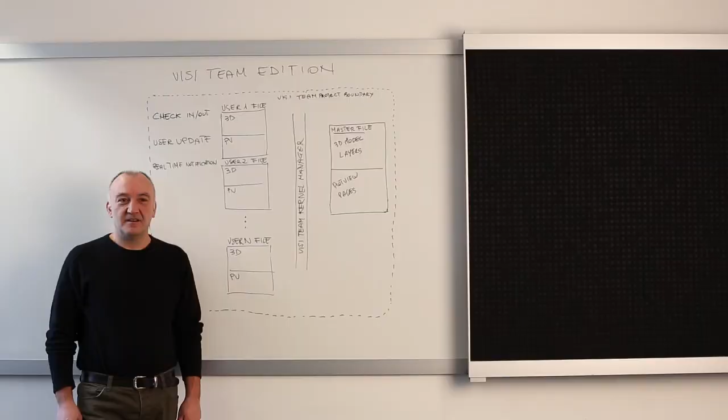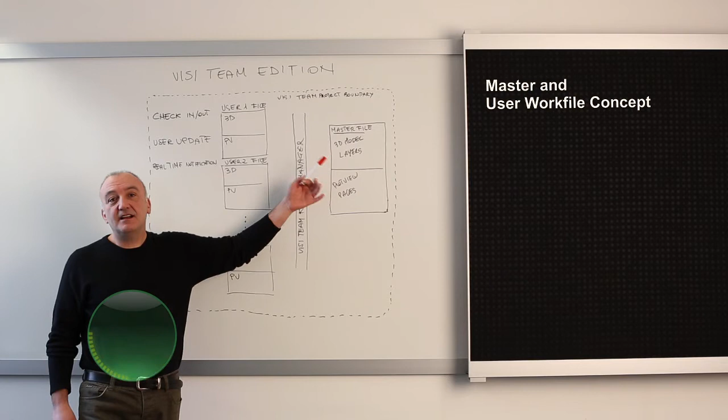The VISI Team Edition implementation is based on a number of fundamental concepts. First, the master work file and user work file concept. The master work file contains all data created by each individual team user.

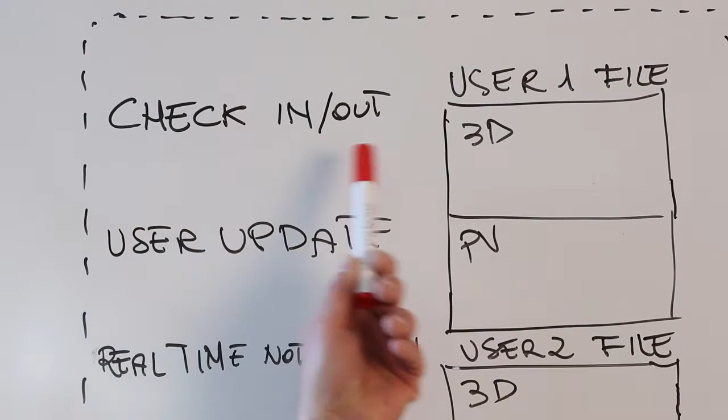As users should be able to work independently, VISI implements another file type, user work files. These are file copies directly assigned to single users, allowing them to perform their individual jobs.

Another fundamental principle is the check-in and check-out concept. Every user working within the 3D modeling environment or the 2D plot view environment has the ability to reserve a set of layers in the 3D environment or a set of pages in the 2D plot view, which moves them to a single user mode.

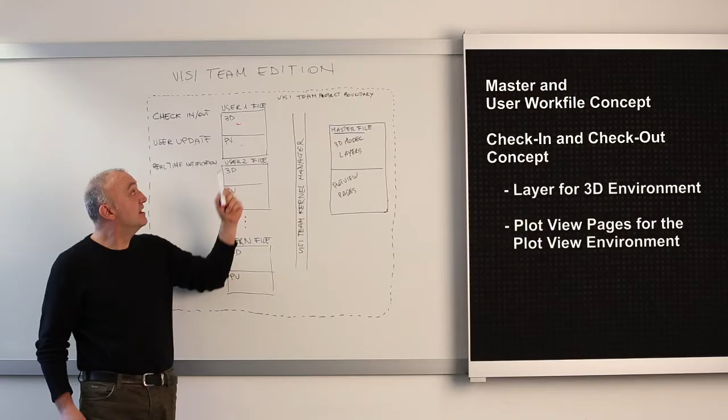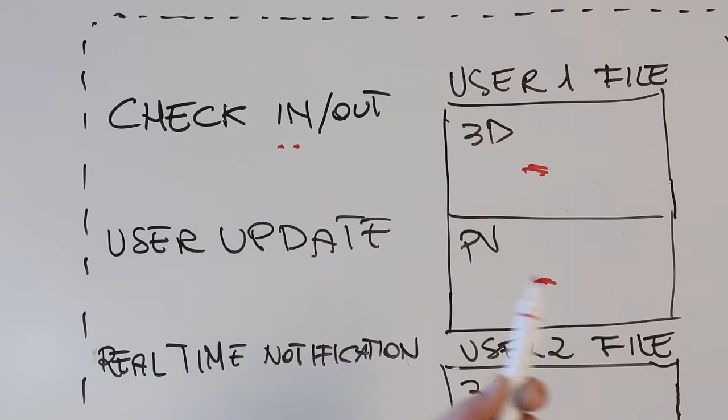This mechanism is called check-out. Once a user performs the check-out operation, they have exclusive access to the previously selected layers and plot view pages. This feature enables them to work independently until they decide to share their progress with the other team users.

The sharing operation is called check-in. During the check-in operation, the user data is transferred from the user work file 3D environment into the master work file 3D environment. In addition, all active team users receive a real-time notification about the changes made within the master work file.

This allows them to perform an update operation, which means they can apply the work progress checked in by another team user to their own user work file.

All concurrent accesses to the master work file are handled by a software layer called VISI Team Kernel Manager. It is specially designed to ensure a solid performance when operating in team mode.

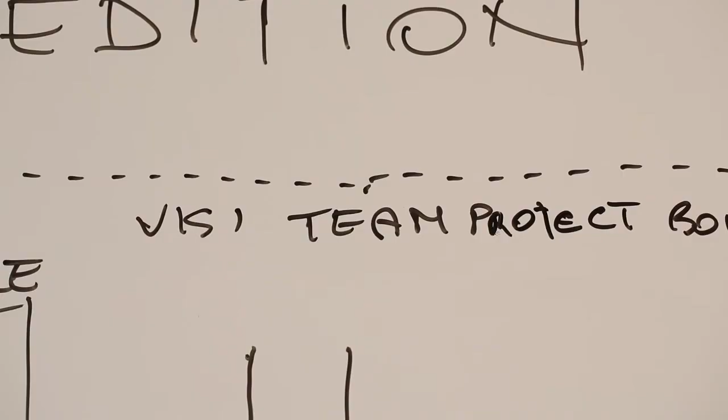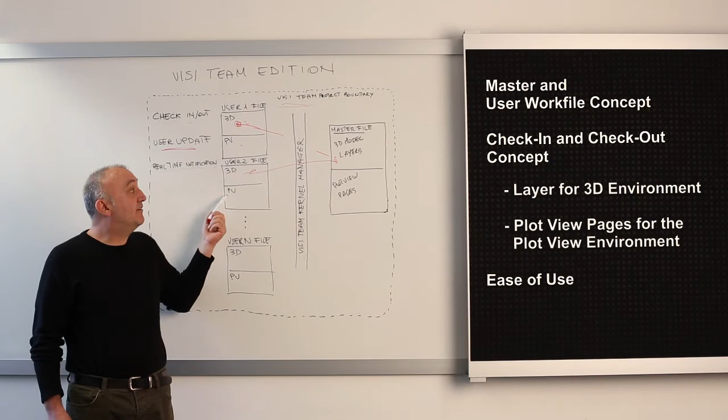The third essential concept is the ease of use. Team users do not have to deal with either the architecture or the handling of internal mechanisms. VISI Team provides a completely transparent and easy-to-use interface that enables users to work both independently as well as together with the whole team.

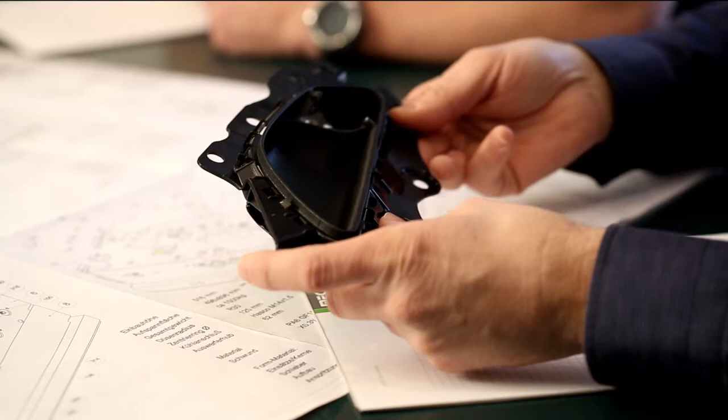In our realistic example, a team should design a complex injection mold. For this task, two 3D designers and one detail designer are designated. The first designer edits the ejector side, while the second designer creates the injection side. The detail designer supports the team with the 2D plot view creation.

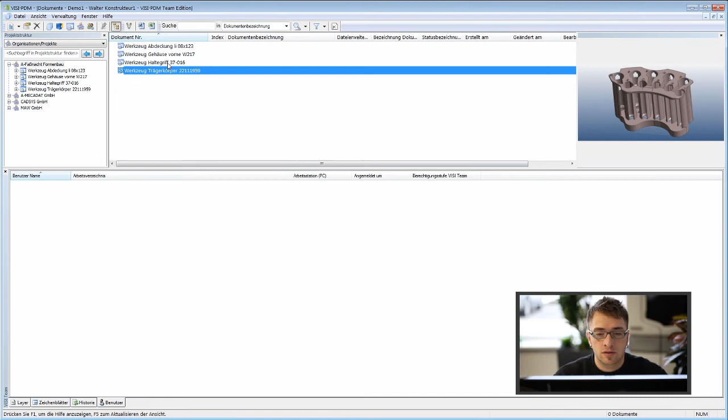At first, the team leader creates a project in VISI PDM Team Edition and includes a basic design he prepared previously. Basic structures for the tool, such as size or layer definitions, are defined within this design.

Once the foundation is defined, the team leader activates the team mode. He sees the layer structure and the plot view pages definition of the basic construction in the VISI PDM Team Edition. In the next step, he defines the design team by adding users.

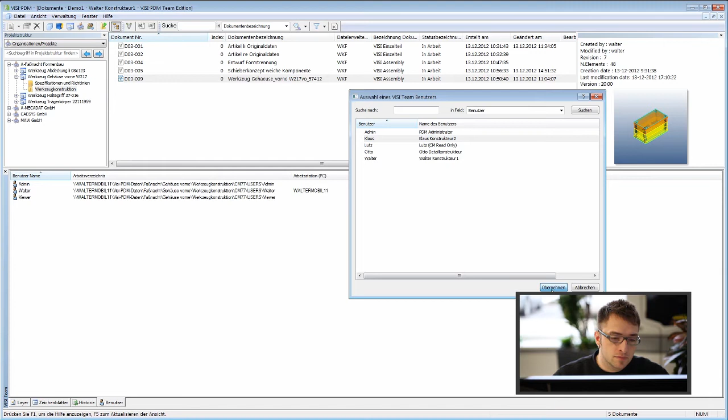The first designer reserves the necessary layers of the ejector side via a so-called checkout operation. Thus, all layers assigned to him are unlocked within the 3D environment and he can start the real design work.

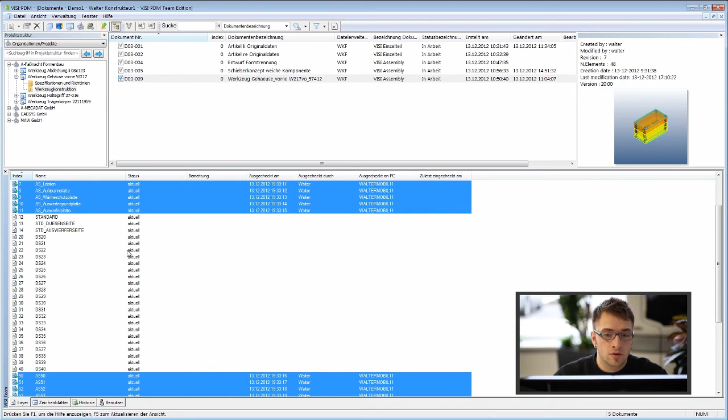At the same time, the second designer, who is already logged in at VISI PDM, begins work. He sees that certain layer sets of the ejector side of the tool are currently being edited by the first designer. Consequently, these are not available to him. The second designer starts working on the injection side by reserving the relevant set of layers.

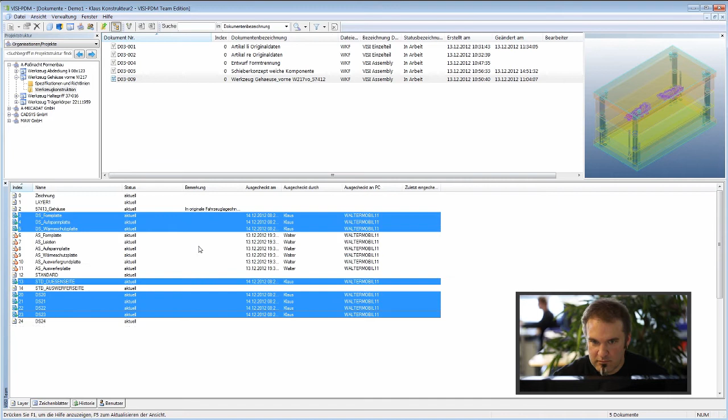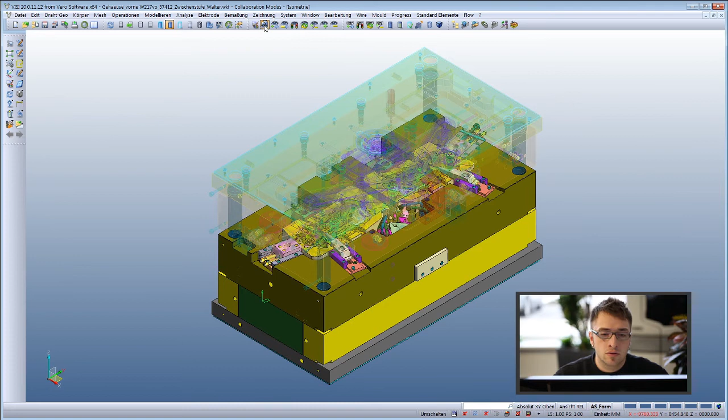The designer starts VISI and begins the real design process. As the design progresses, every designer gets to see all sets of the tool. Sets not currently edited by the designer himself are displayed in a faded-out, transparent way and locked for edits. In the Layer Manager view, the current status of every layer is displayed for all users.

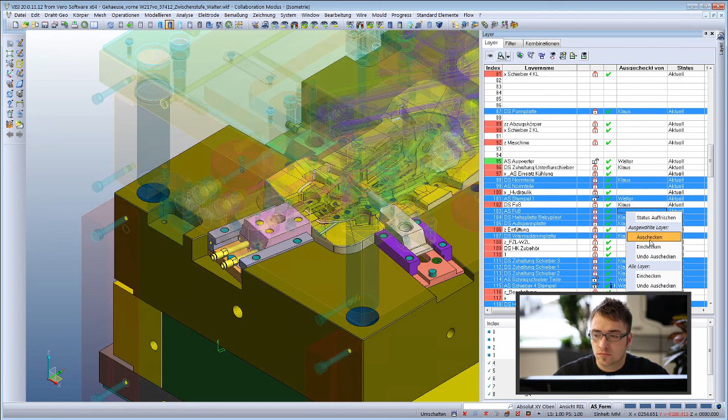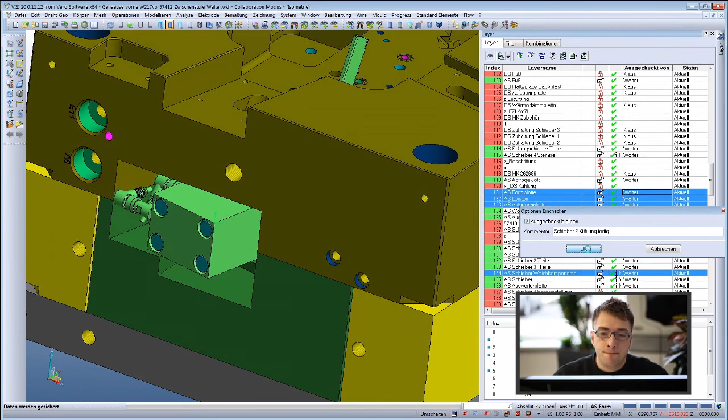Operations like check-in and check-out can be run with the Layer Manager to reserve additional sets or create new ones. Our project is now in a progressed state. The first designer installs an underfloor slider as well as the cooling of the die plate. The designer has now completed the design steps mentioned previously. Thus, the progress made should be provided for the team members, so he checks in the relevant layers.

During the event, the master file is updated and the comment previously created by the designer is added to the history. The second designer receives a real-time notification with the corresponding comment. With the Layer Manager, the status of the updated layer changes.

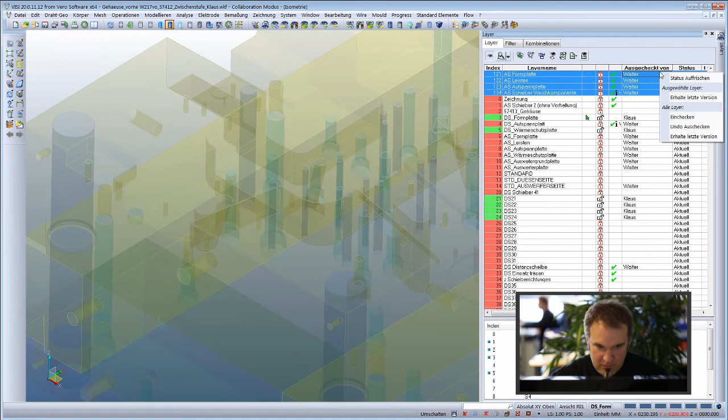VISI displays that these layer sets are deprecated in his design. Consequently, the second designer updates his file and is now able to view the current state, including all changes made by the first designer. He can access locked layers and perform operations such as measuring, querying, etc., and continue working in his environment.

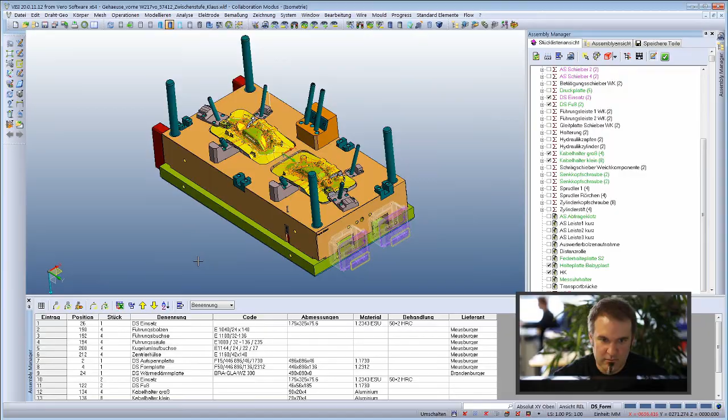Another important aspect is the bill of material. Although the designers are working on different sets of the tool, they can simultaneously edit and complete their section of the bill of material within the VISI Assembly Manager. The bill of material view of VISI PDM displays the current bill of material version of the whole design.

You can not only distribute the 3D environment among multiple users, but also the plot view pages to speed up the tool documentation.

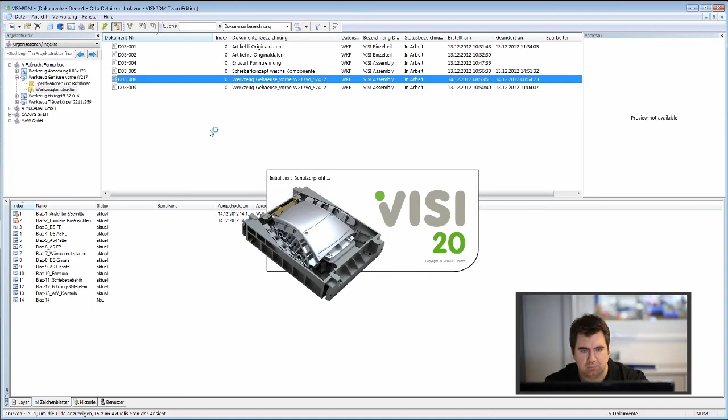After the launch of VISI, the detail designer is able to reserve the desired plot view pages and create new ones. In the plot view manager, the created plot view pages are displayed with their corresponding status. The designer checks out a 2D plot view page and starts the plot view creation.

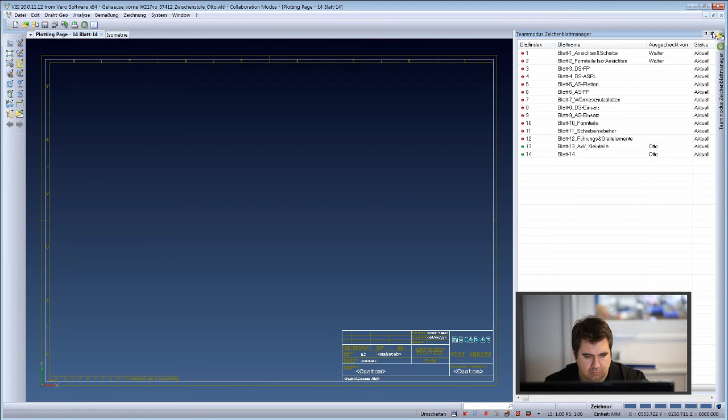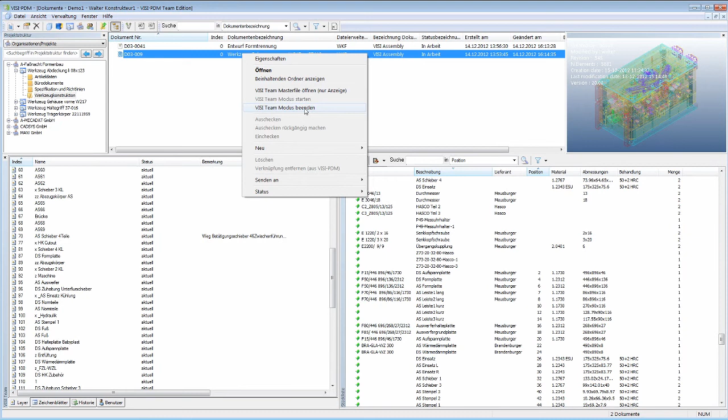Plot view pages assigned to him can be viewed but not edited by other team members. After the completion of a plot view page, it is checked in again, resulting in an update of the master file. If all design jobs are checked in and the design is completed, the team leader ends the team mode. Afterwards, the whole design, including the plot view pages, is again in a single work file that is now ready for production.

VISI Team Edition consists of VISI Modeling and VISI PDM. It is an integrated solution that allows the design process to be split among several team members.

Distribution and management of their project data is handled completely and automatically by the VISI system. Therefore, the user can completely focus on the tool design without having to worry about any of the processing mechanisms.

This makes VISI Team Edition the ideal solution for a designer team to work simultaneously and together on the same project. It provides short learning and implementation time thanks to a simple and intuitive user interface, the possibility to work on extensive and complex tool designs in a team, and shortened cycle times during the design process and thus shortened delivery periods.

VISI Team once again shows Vero's ability to deliver verticalized and innovative software for the mold and die market. That makes the difference.